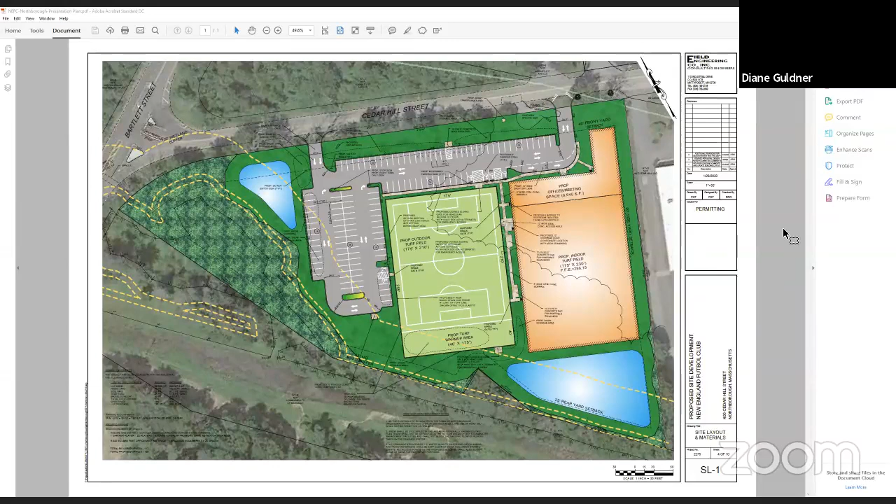Mia, if I remember this one, we were pretty pleased with the way they were going, right? We had asked for a couple of changes over time. They had made the change, I think, to parking lot size and a few other items. Yes, and where we left it, we had a couple outstanding items that have all been addressed since then. Okay, and they were to get the DEP file number. Was that? Nope. Sorry, wrong notes. Let me grab the correct notes. Here we go.

We were kind of interested in crumb rubber and its effect on the groundwater. And then after our March meeting, we did receive a letter from DCR. And then I threw myself into researching crumb rubber and its effects on groundwater along with Fred. I did find a really useful document; it's called the Coastal Marine Resource Center Policy Projects Independent Group. And they came up with a list of recommendations for containing and managing crumb rubber.

And Rich also was working with some consultants and came up with a large amount of supplemental information that I read through, and maybe Rich could take over and show us all the changes he made to incorporate those recommendations. Okay, yes, Rich Riccio from Field Engineering on behalf of NEFC. We met back on March 9th, I believe, was the last meeting, and we were still awaiting a file number, which since came through.

DEP had a couple minor comments on the issuance of their file number. One was that Basin 1 did not have a 50-foot setback from wetlands. If you look at the screen where my cursor is, Basin 1 is the basin on the northwest side of the site, and we were able to massage the grading on this basin so it was completely 50 feet minimum from the wetland system.

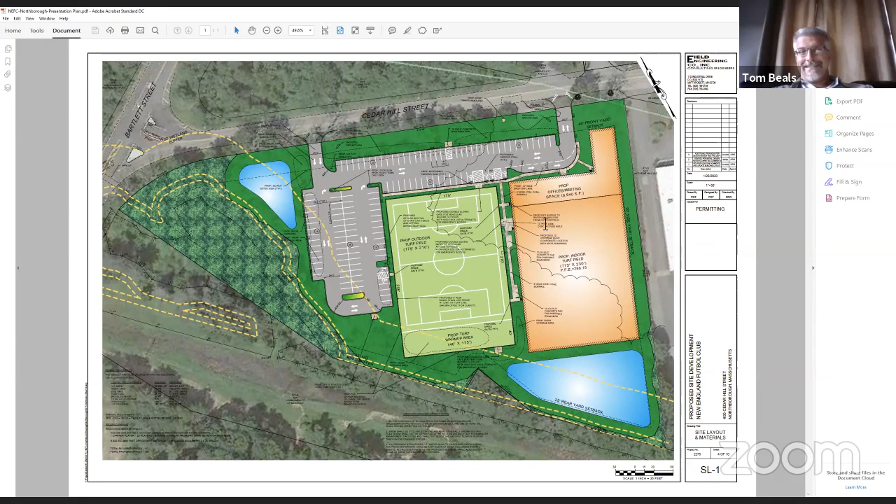Okay, then let's go ahead and close the hearing. Is there a motion to close the hearing? Make a motion to close the hearing. Tom Beals made the motion, second from Diane. We're voting. Diane Guldner, yes. Tom Beals, yes. Todd Helwig, yes. Justin Dufresne, yes. Kelly Marston, yes. Myself votes yes. Hearing is now closed. So we need a motion to issue an order.

Do we have any special conditions with the order, Mia? I have a pre-construction meeting, the standard stormwater system boilerplate, and I'm going to append the operation and maintenance plan both for the stormwater system and the Crumb Rubber Field. You get a SWPPP with this one too, right, Mia? Yep, I'll get that in there. We need their copy of their SWPPP reports.

Kelly was talking about the dumpster being close to the resource area. Do we need to be concerned about trash and so forth maybe blowing into the wetlands, and if so, have it cleaned up on a regular basis? I'll put that in there. I just drafted one for Bartlett Street because of 301 Bartlett. Yep, we'll put that in there. Okay, trash will be maintained and nothing will enter the wetland. Okay, anything else?

All right, we need to get a motion to issue an order of conditions. I'll go with it. Motion to issue an order of conditions for Cedar Hill Street with the conditions that Mia mentioned. Second. Second from Diane or Kelly? It was Kelly that time, right? Yes. Okay, let's go with voting.

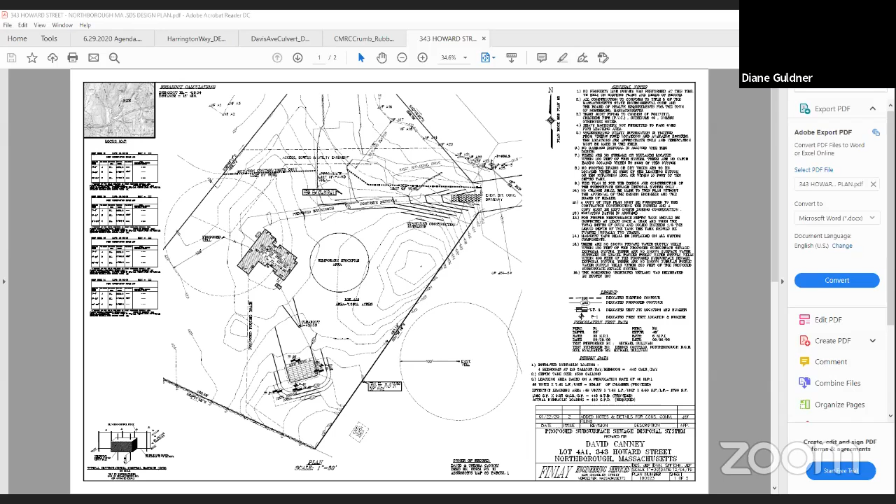Okay, I think Tom seconded it. We'll vote it. Diane, yes. Tom Beals, yes. Todd Helwig, yes. Justin Dufresne, yes. Kelly Marston, yes. And myself, yes. Hearing is now closed. Mia, the order has nothing special, I think, correct? No other special conditions, and it's pretty straightforward, very little impact. Yeah, just the standard boilerplate. Okay. Motion to issue an order.

We need one. Okay, I'd make a motion to issue order of conditions for 343 Howard Street with the plans as provided. Second. Seconded by Todd. We're voting. Diane Guldner, yes. Tom Beals, yes. Todd Helwig, yes. Justin Dufresne, yes. Kelly Marston, yes. And myself votes yes. Unanimously carried. Thank you for your time. Thank you. Good luck. Okay.

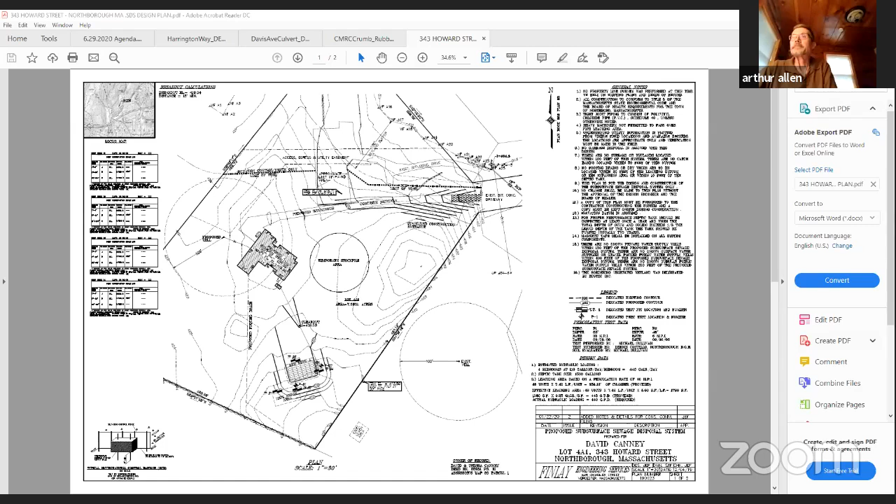Okay. So Mia, you've got to stop sharing your screen, I think. Here we go. All right. Moving right along. I would say we're ahead of schedule, but I don't want to jinx ourselves here. So we're just barely hanging on.

Okay, so let's go to Harrington Lane. Craig Callahan. Let me see who's here. Mark Arnold, he's the representative. Okay, let's see. Mark Arnold. I saw his name. Mark's promoted. Chairman. Hey, Mark, we can see you and hear you. Great. Excellent. Tell us about Harrington Lane.

So Harrington Lane, this notice of intent is a refiling of an expired order of conditions for Harrington Lane. It was a subdivision off Washburn and Howard Street with a cul-de-sac coming off of Washburn Street and dead ending. It involved a slight wetland crossing, with impact to BVW and Bank. We had a wetland replication area that was already constructed. The roadway base is down. The basin has been excavated out, but has not been finalized. And the lots are currently partially under construction that are outside the buffer zone.

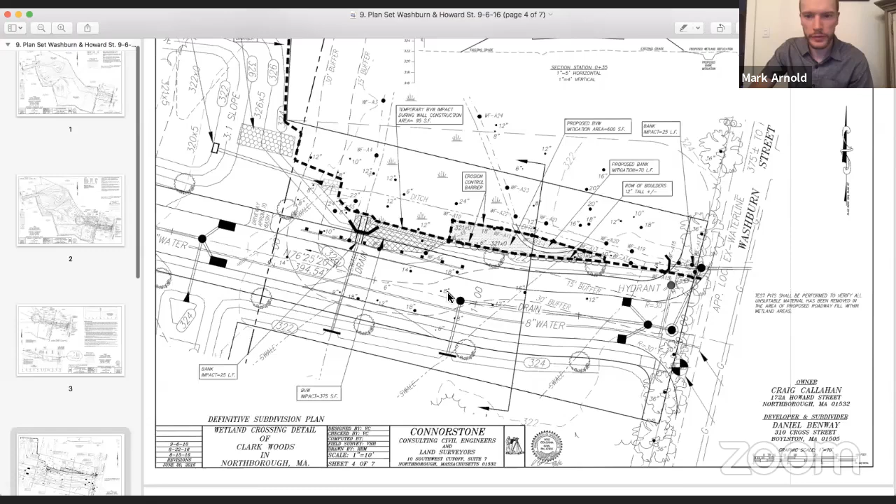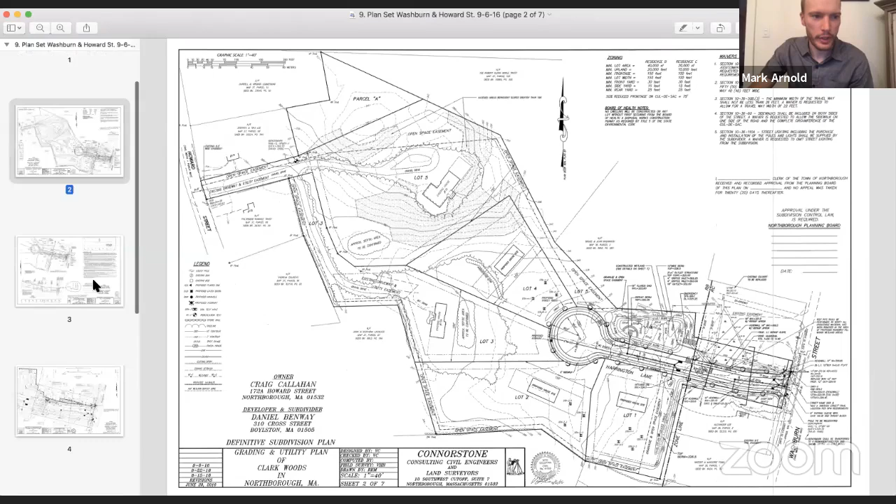So this is the full-size plan here showing Howard Street to your left, and then to the right here you have Washburn Street, the cul-de-sac road that comes in. So this is already base coated all the way in. And then I'm going to zoom in to another sheet to show you the actual resource area work, or buffer zone work, I should say.

So this is the zoom in, Washburn Street to your right. The roadway came in. We had a permanent impact of 375 square feet of BVW. We had 25 linear feet of bank impact here, and also 25 linear feet of bank impact down here. We built this 600 square foot BVW replication area here that also included 70 linear feet of bank interior to the BVW. That's been monitored for 2 years now and is established.

The base has been installed, including all the utilities. So all the catch basin structures are all in, going through in different ways, including all the way up to Washburn Street. And the shoulders are vegetated with weedy vegetation that kind of is naturally established there.

The project was halted slightly just due to a conflict between the previous contractor and the owner, which had to go to court. That's been resolved. So Craig Callahan, who's the original owner of the property, wants to get the project finalized and wants to have a valid order of conditions so he can complete work under a DEP number. Okay, good. It would be great to get that done.

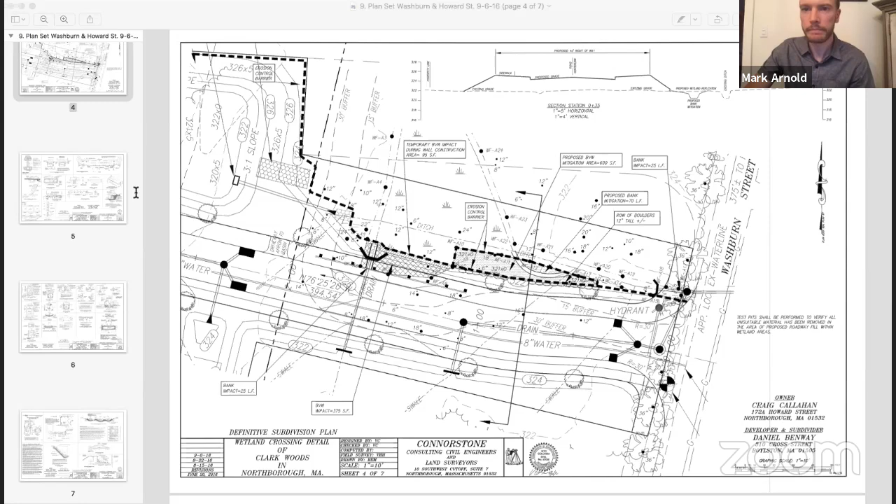But I know we did discuss this when we received the order of conditions and communicated that to Craig, that you can file a deed restriction and you don't require 401 water quality cert. So that was in regards to that. So those were the questions that were raised by Judy Schmitz from DEP. Okay. Yeah, how does that last item affect our ability to issue an order? It's fine. We can make it another condition that they record the deed restriction. We can just echo it on our order.

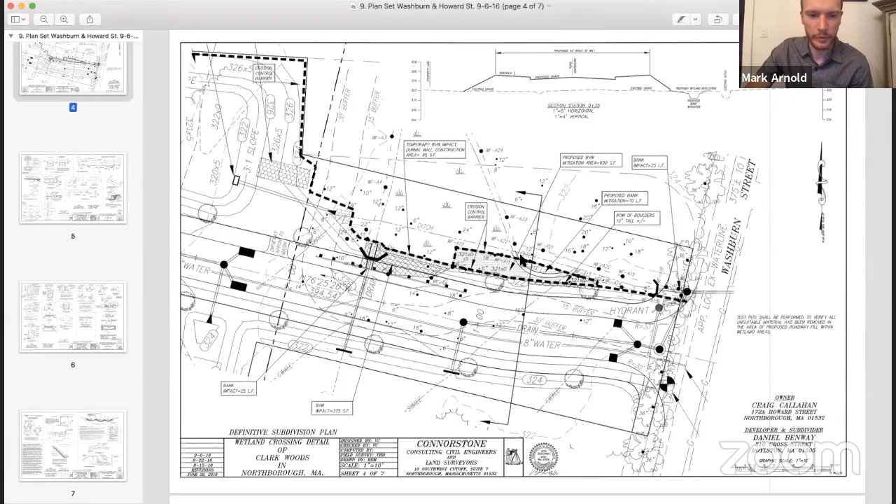I just wanted to confirm, Mark, you said there was a typo. So we're going to be using the numbers from the old order, which is 375 square feet of BVW and 50 feet of bank, with a replacement of 600 square feet of BVW and 70 feet of bank. Correct, and that's as reflected on the approved site plans, which were from September 6th of 2016. So those plans, which were listed on the order, show all those wetland impacts and the restoration area on it for permanent disturbance. So those numbers were correct as based on the plan.

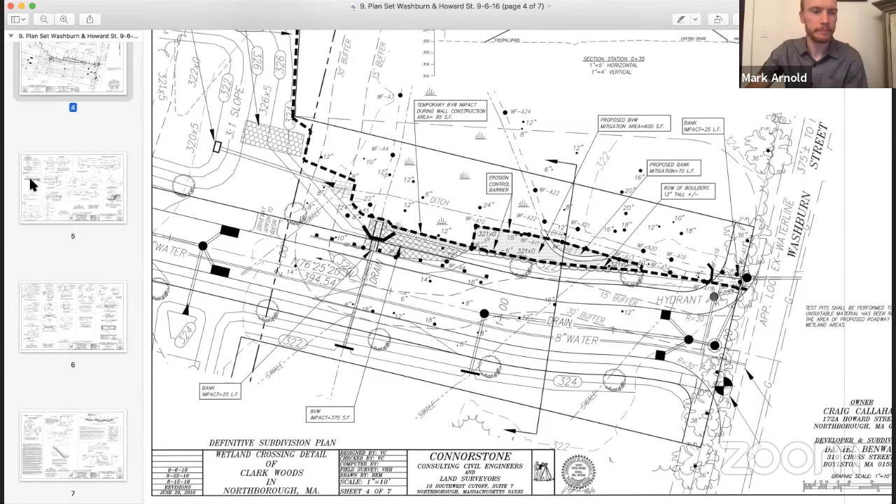So in the narrative in the NOI it might have been unclear that those were the old impacts that were reduced. Because the original notice of intent was filed with larger wetland impacts, and then we revised the plans and shrunk the wetland impacts to get approval. Okay. Okay.

I guess just a quick one for Greg and Mia. You mentioned you were out there last week. Do the erosion controls still look good, or do they need to refresh those before starting construction again? I think they could use a little refreshing. This might be something we probably want to add. If we're going to issue a new order, if construction's been stopped for a while, if they still need to clean out the basin and get it mucked out and put the final grades on that, there's still a good amount of site work to do. So at least get the erosion controls freshened up.

Yep. The straw usually doesn't last 3 years. Yeah. It's probably due to be replaced. Yeah, it does need to be replaced. I didn't notice any erosion around the replication area and around the basin when I was on site last, but again, I think it does need to be replaced. Perfect. This plan shows an erosion control barrier between the mitigation area and the wetlands. That's been removed because the mitigation area is fully functioning. So I think that should be fine.

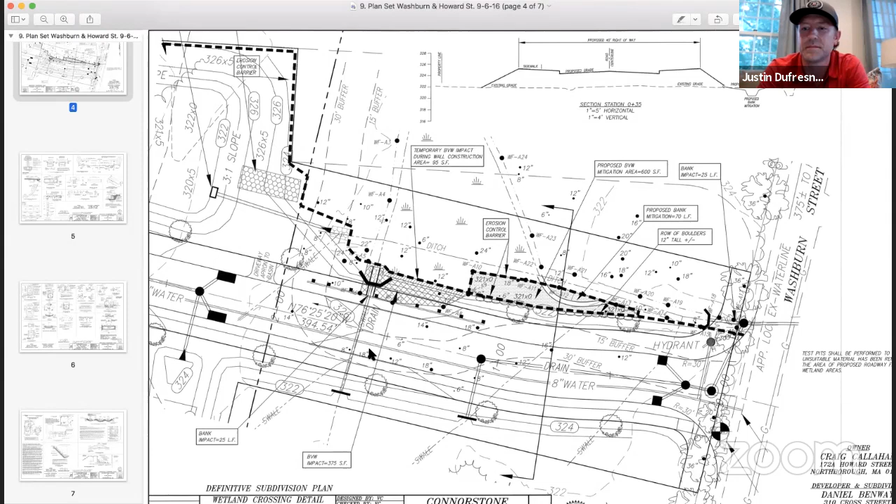I guess just areas where they'll be doing some site work up gradient of, if they need to do final grading and loaming and seeding and different things, then those areas. But yeah, understand that between the mitigation area and the wetland, that should just stay as is if that's constructed. Makes sense. Any more comments from the commission? Let me check. Any attendees have any questions or comments? I'm doing a view here. I don't see any hands raised.

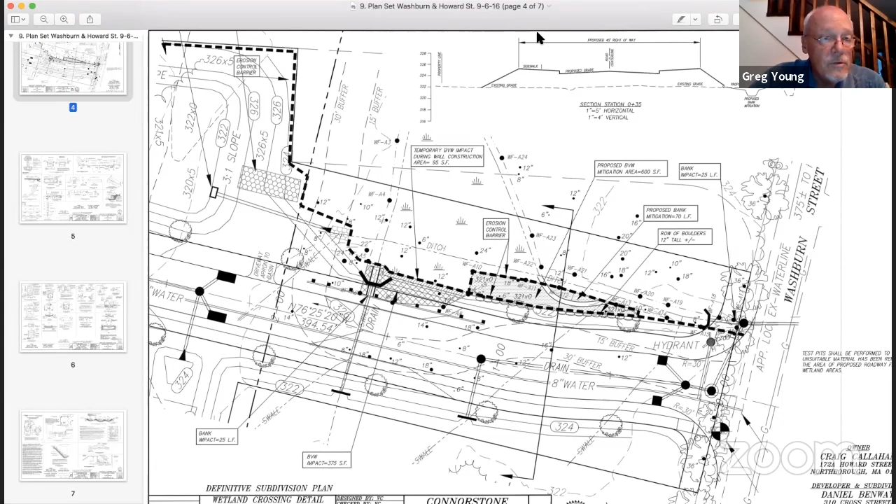Okay. Let's have a motion to close the hearing. Move to close the hearing. Motion by Todd, seconded by Kelly. We're voting. Diane, yes. Tom Beals, yes. Todd Helwig, yes. Justin Dufresne, yes. Kelly Marston. Kelly Marston's on mute. Yes. And myself, yes. The hearing is now closed.

Kelly, I'm glad you're on mute for that reaction, maybe, right?

Okay, so hearing is closed. Mia, special conditions we're going to have? So far I have: recorded on the deed, the mention of the wetland resource areas. That's kind of a note to myself to use the old numbers from the old order, and that the erosion controls are installed. So it'll be our standard erosion control installation. Yep, okay, good.

We need a motion to issue. So I would move to issue an order of conditions for Harrington Lane, subject to the conditions that Mia just identified. And one more is that the stormwater operation and maintenance plan will be appended. Okay. Is there a second? Second. I think that was Diane. Yes. We're going to vote it. Diane, yes. Tom Beals, yes. Todd Helwig, yes. Justin Dufresne, yes. Kelly Marston, yes. And myself, yes. Okay.

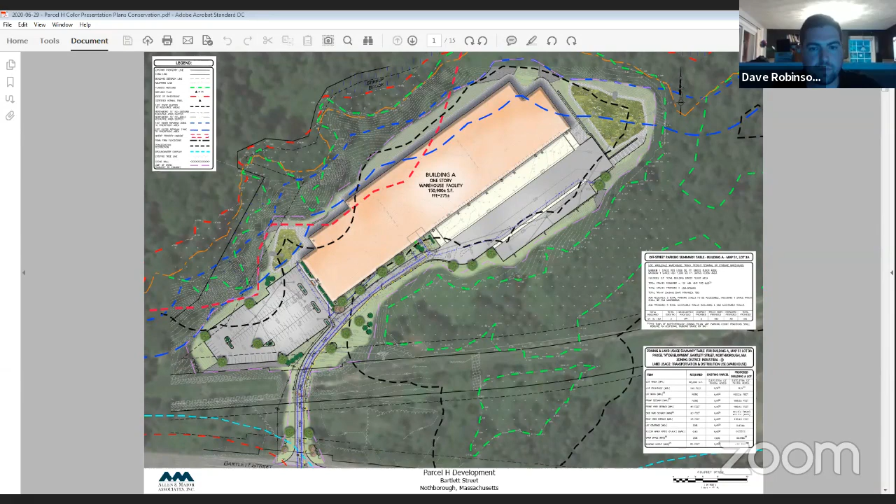Okay, could I share my screen? Might be helpful. Yep. I stopped sharing, so you should be able to. Okay.

And I'm sorry, Dan, can the commissioners see? I cannot see anything, no. Yeah, I was just gonna say, nothing's up. Okay. Still the same? You're not seeing anything? Same. No. Okay. Yeah, something's not working. So I can pull any plan up. Which one is it, Dan? Okay, it's the wildlife habitat evaluation. Okay. Page 2. All right, let me get that up. From the evaluation or from the habitat restoration plan? The actual evaluation itself. Okay. So page 2 of the evaluation. Yeah, exactly. There's an aerial photo showing the different habitat types.

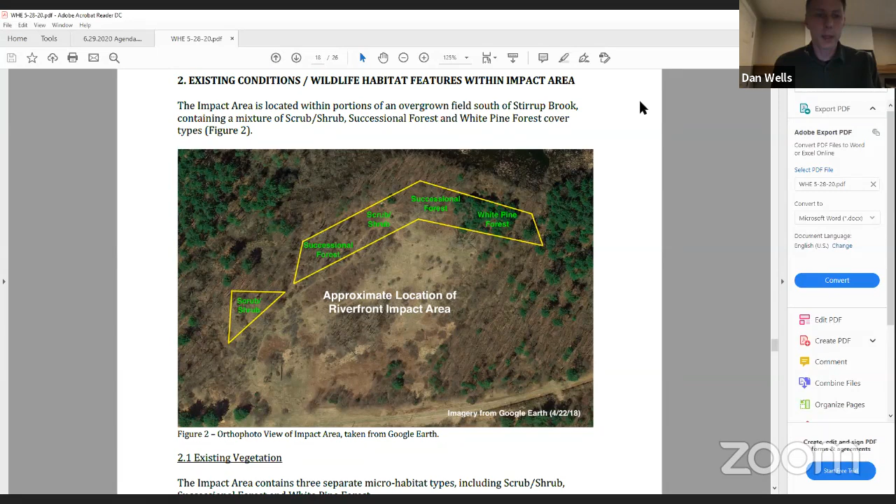What was unique and valuable, in my opinion, was part of that scrub shrub habitat had a lot of berry producing shrubs, particularly the high bush blackberry. There's quite a bit of invasives mixed in, multiflora rose, bittersweet, honeysuckle, but that is a native species with a lot of value because of its fruit. So the total amount of that type of habitat that's going to be altered is just shy of 20,000 square feet. And so, in my opinion, some mitigation was warranted for this project to offset the loss of the habitat function of those berry producing shrubs. It also provides a lot of cover for small mammals.

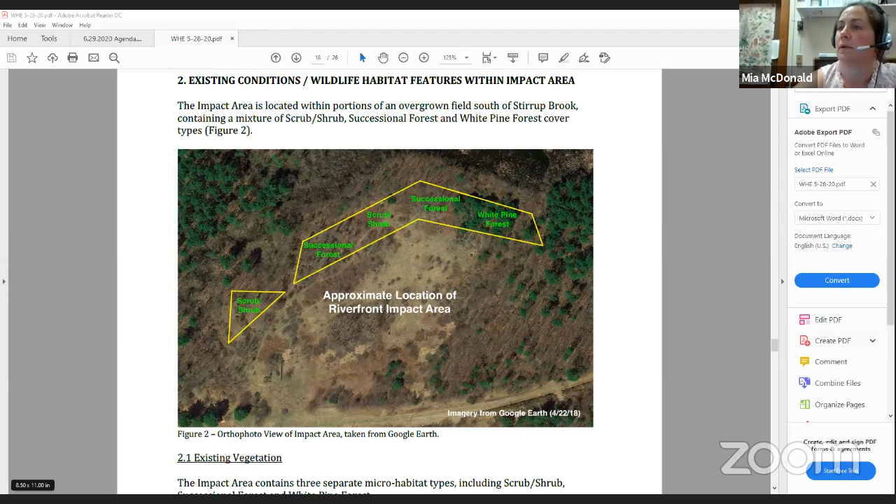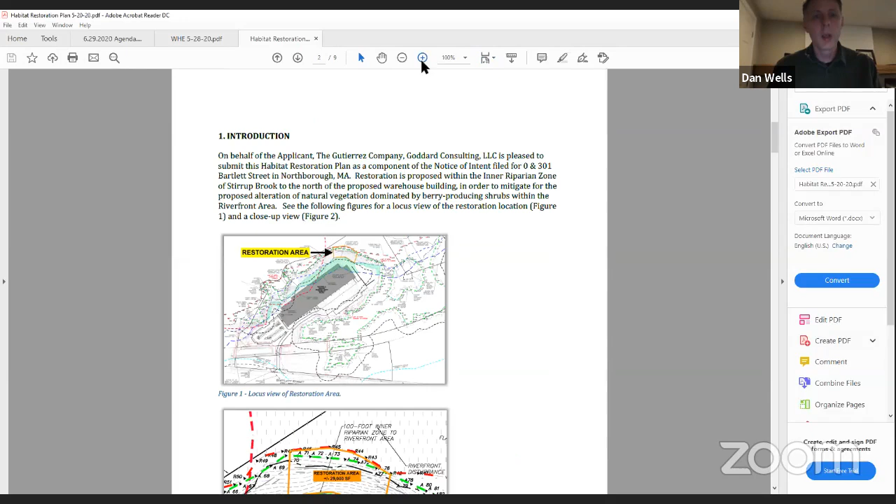So I guess, Mia, if you could open the habitat restoration plan. Sure. And scroll down. Yeah, up a little bit above that. Right here? Yeah, if you can zoom in a little bit, this shows an overview where we're proposing this restoration area. So it's to the immediate north of the building. And if you go down to the next one, it kind of zooms in. You can see it's about 29,000 square feet, and the limit of work is that black dashed line. This restoration is going to take place in the inner riparian zone all the way up to the edge of the river. If you go down the next page, Mia.

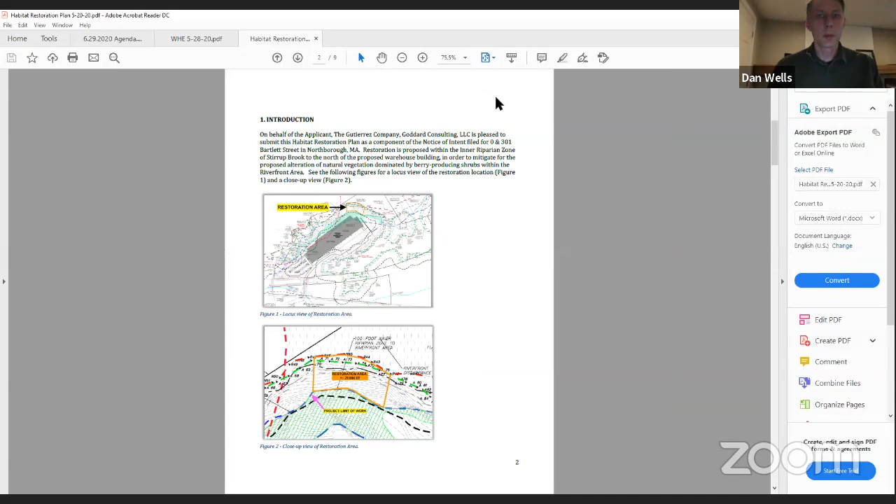So yeah, and zoom in on that. So I'll walk you through the reasoning for choosing this area. As you see labeled on this figure, to the right, you see the blue line, that's Stirrup Brook as it flows from west to east, just to the north of this restoration area. To the left of this photo, it's a narrow channel through a forested wetland. And then as it enters this photo on the left, it's a very wide shrub swamp, but it's very dense. There's no real open pockets of water. And then where the blue arrow ends, just to the north of the restoration area, that's where it opens up into a real open water habitat with deep marsh.

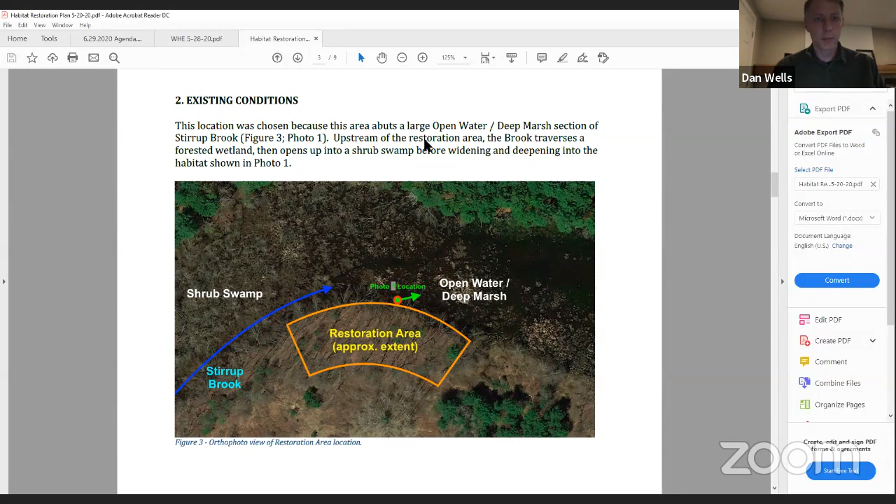And so that area is the most likely to be used by ducks, geese, things like that. When I was out there in the spring, there were pickerel frogs calling. And so a big part of why I selected this area is it provides a physical buffer between the building and this critical wildlife habitat feature of the open marsh. And if you scroll down to the next page, Mia, there's some photos of the existing habitat. So that's what the open marsh looks like from just on the edge there. You can see there's clearly good habitat for ducks, turtles, waterfowl.

And so if you go down to the next page, Mia, this shows what the habitat is like in the actual area to be restored. All that light green vegetation, that's multiflora rose, bittersweet, honeysuckle, and some glossy buckthorn. But another favorable reason for choosing this area is because, as you can see, the size and scope of those invasives is not 100% cover. It's manageable, in my opinion.

Whereas in some parts of the site, it's over 6 feet tall, and it would just be a futile effort to try and manage it. But a lot of this you can actually dig up by the roots and totally eliminate it. You can see most of those trees growing in there are native red maples. There's some high bush blueberry and winterberry. So the approach is to try to dig up all those invasives by the roots as much as possible. If that isn't successful in the first season, then we put in treatment with herbicide.

But just by removing those invasives, a lot of the native ground cover is going to spring back to life. And we're also proposing to supplement that removal with plantings: 48 native shrubs, highbush blueberries and winterberries, and then 60 native ferns. As you can see, it's not just a clear-cut area. Those new plantings are going to be randomly interspersed among the existing red maples and the good things that we want to keep there. So it's not a matter of going in and just chopping down everything. It's very selective, very carefully monitored.

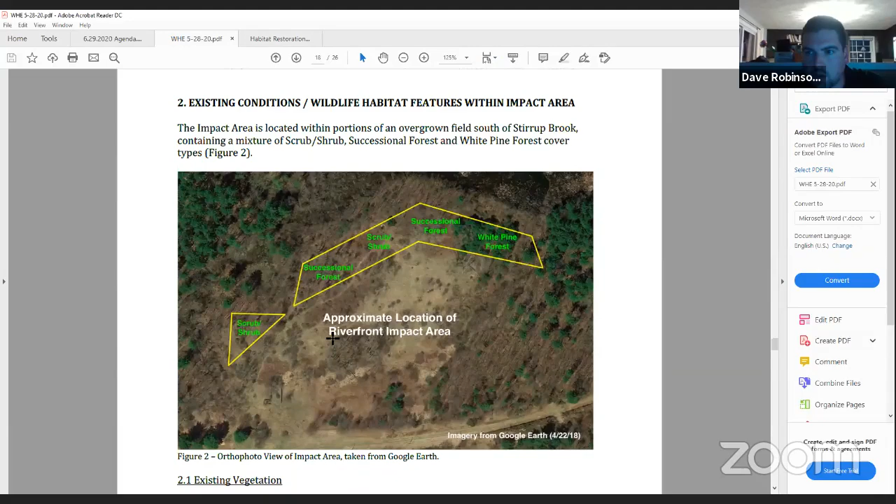So this black line is the limit of work. That's the 100-foot buffer to the wetlands. And then the blue line at the rear is the 100-foot buffer to the flagged riverfront. Okay, so behind the blue line, I'm just trying to picture it with the pictures we saw of the swampy area. So the swampy area would probably be right behind that blue line.

So the closest is over here where we have wetland, but it's not riverfront area. But I've walked that area, that's all forested upland. It really doesn't get swampy until you get to the very toe of the slope. So anything up on that slope is pretty dry. We've walked it a couple times, and it really only starts to get marshy once you get closer to the Stirrup Brook from those wetland flags. In here. Yeah, and even further in.

Okay, thanks. I was just trying to compare this drawing to the photographs we saw. Okay. Does that help, Amy? Does that answer your question? Yeah. Good. All right, thanks. All right, thank you. All right.

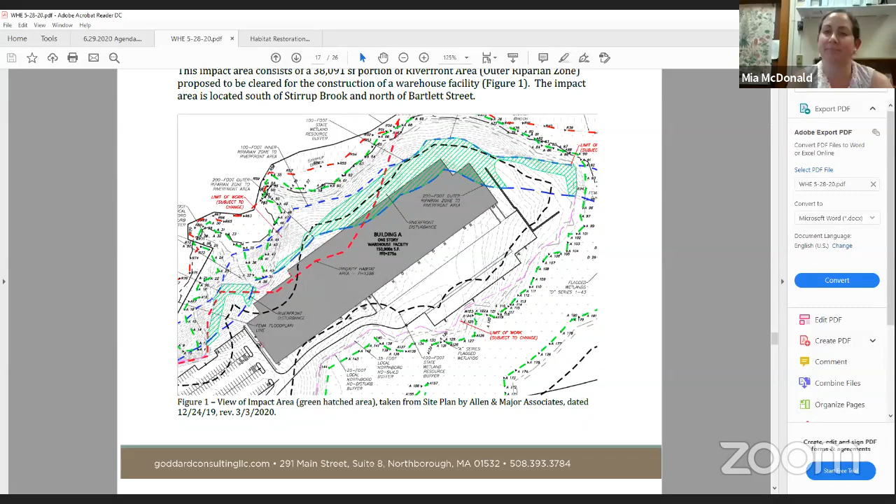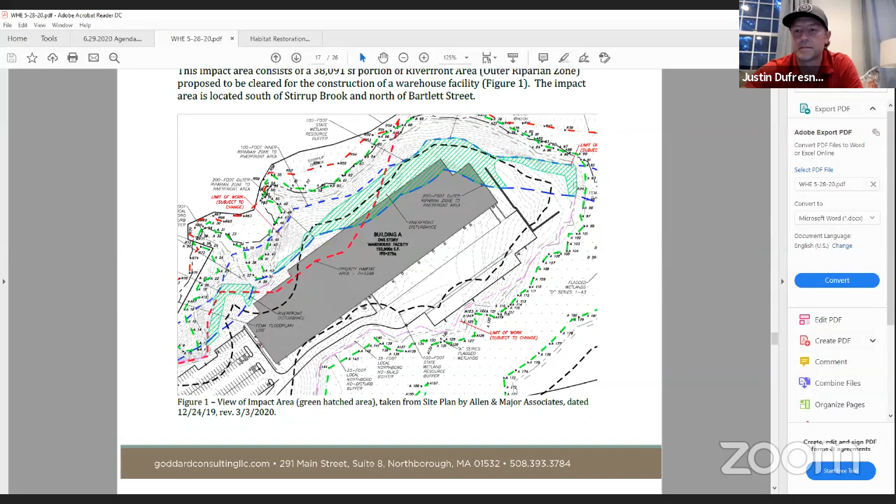And just, I'm thinking that if there's anything significant that came out of another board that they'd loop back to us. Mhm. Yeah, I guess that's it. I've seen it before where you could get a reduction in parking, which could change drainage calcs, which could change the size of a basin. Yep. If our order's already been issued and it refers to a set of plans, then you need to reissue it and everything. So just want to make sure. Okay. All right. I think we're good.

Thank you, gentlemen. Thank you very much. And Dave and company, thanks for working with us. I know there's been a lot of give and take and discussions here, so. Yeah, you guys have been great to work with. Thank you. I really enjoyed it. Everyone appreciates it. Thank you.

Drop some people here. I think that's it. All right, just us. Okay, well, we're cranking along here at 8:30. I mean, we can pull out our second hidden agenda item we haven't even talked about yet. We go till 9 or 10 or so, right? I hope not. Oh, no, no. So I think we can knock these out quick. Yep. Certificates of compliance.

Yep. I visited all 4 sites. They're all stable. They're all built as approved. No issues. The only issue that was outstanding was 124 Howard Street. They built that wall and then we required them to put in some blueberry bushes. Yep. They did, and it's complete. Good. So there's really no issues at any of them. If anybody has any questions about any of the particular sites, I can answer them. No, the Coleman House was a long time ago. Mhm. Yeah, no, I'm good with the ones that I know. Anybody else have questions on those? Nope, not for me. All right.